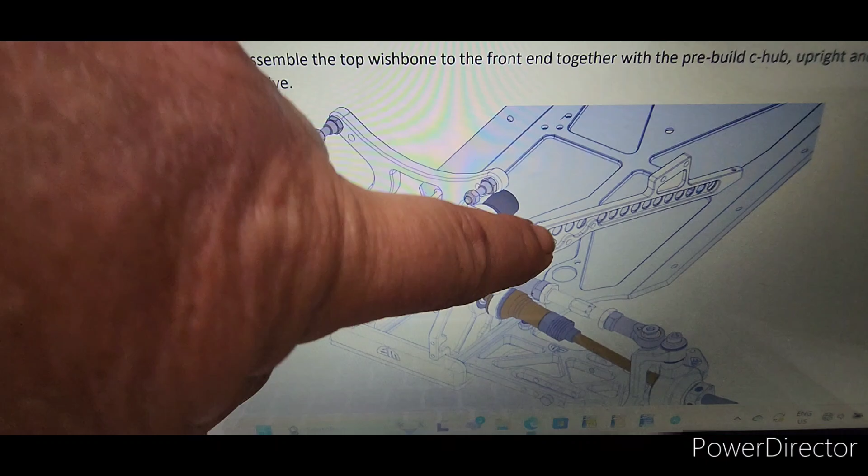Alright, this is what we're up to. I've installed that chassis brace. There it is, 2 bolts there which brings that together, and 2 bolts underneath. We're going to skip to the next part.

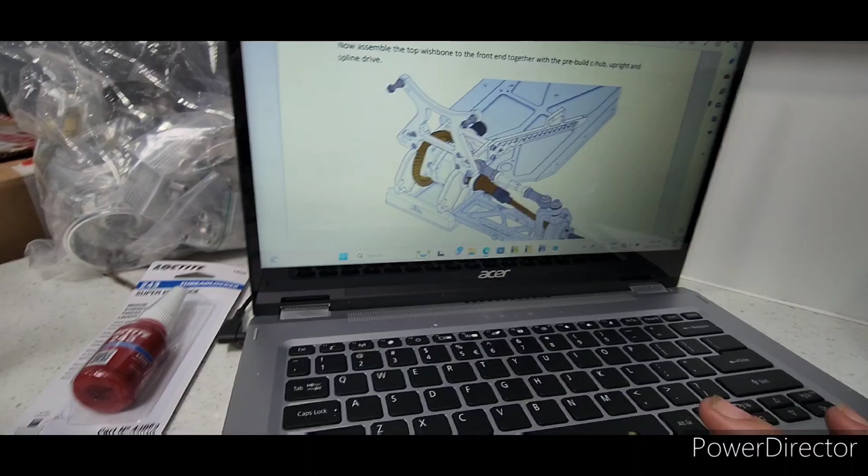Which will start doing the steering. Servo steering, here it is. So I've got all the parts laid out, that's your parts here, and we'll start putting it together.

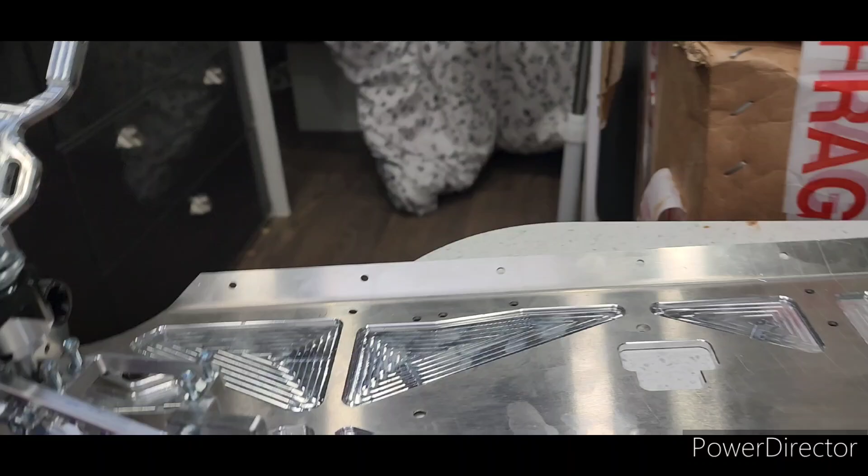Okay, got it all together. I'll put the servos in later. So what I'll do is get the other side done, that way this bit here is complete. And then we can move on to, I've got all this part goes on the engine, so that'll be the whole center bit. So anyway, I'll get this done first and then we'll start on the middle bit.

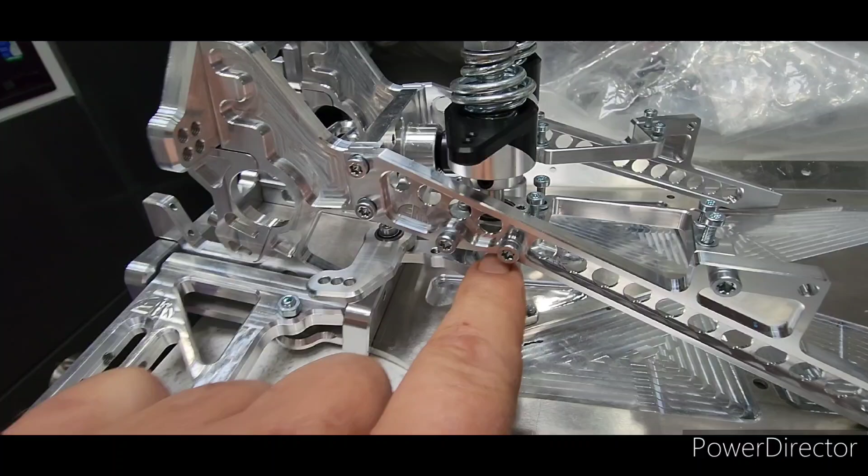Okay, I've put all the steering together, that's how it looks. Just goes like that. Pretty easy guys, now you got grub screws that hold it into place. Make sure you use Loctite on these. And you've got your bolt over the top.

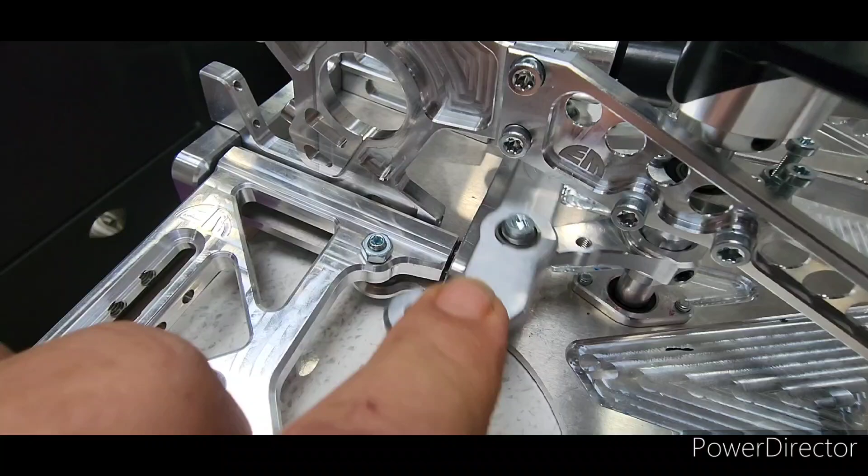Get your nut, screw that down. Then you got your steering plate, it's got a bolt that goes up through underneath. You got your bearings and inserts, pretty much the same as the Losi, how you got your inserts and your bearings. Yeah, and just Loctite it all up.

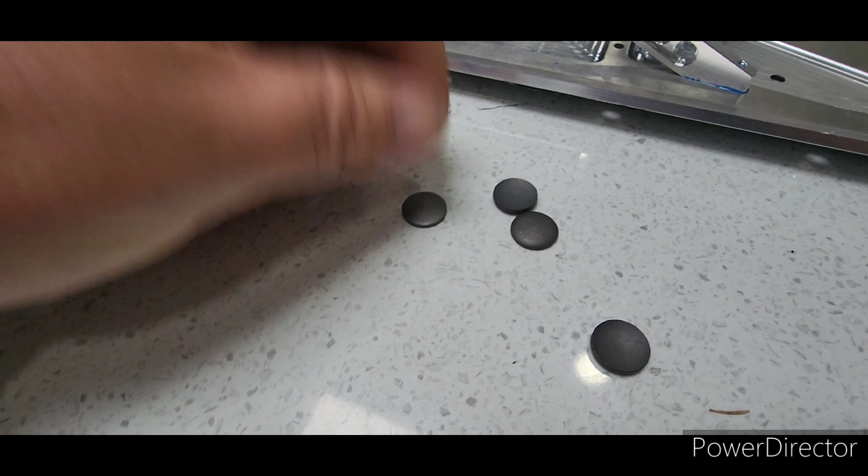What do I got to do next? I've got to put the bump stops in, forgot about them. Cheers, Ash. I was trying to work out which way they go, but apparently they go dome up, which will go in here. Make sure you glue them because you don't want them to come out. So I'll do that now. Okay, all the bump stops are glued in.

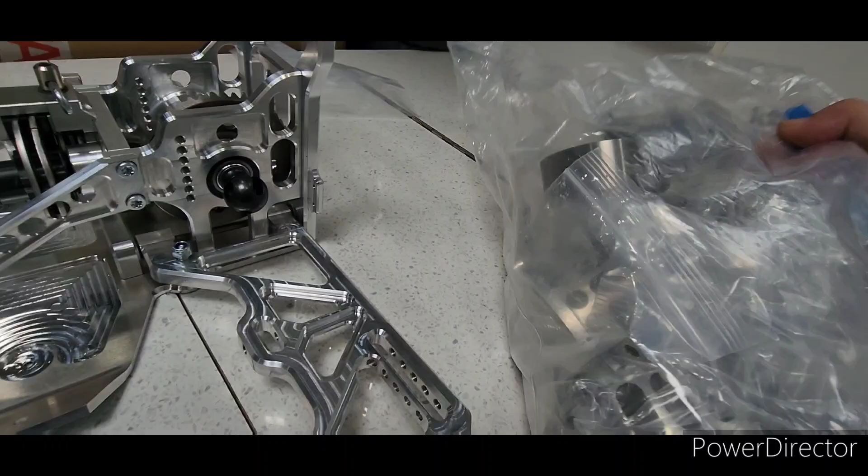So I've done all them. So what I'm going to do next, I have no idea. I might get started on the center bit. That's your engine and clutches. Yeah, I'll get started on this. So I have to take all this out and get started on that. That'll be all the center bit there. So alright, let's get started.

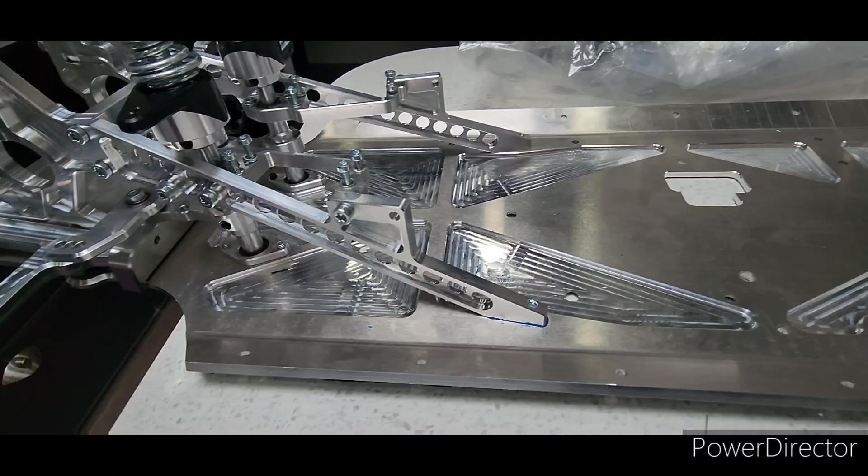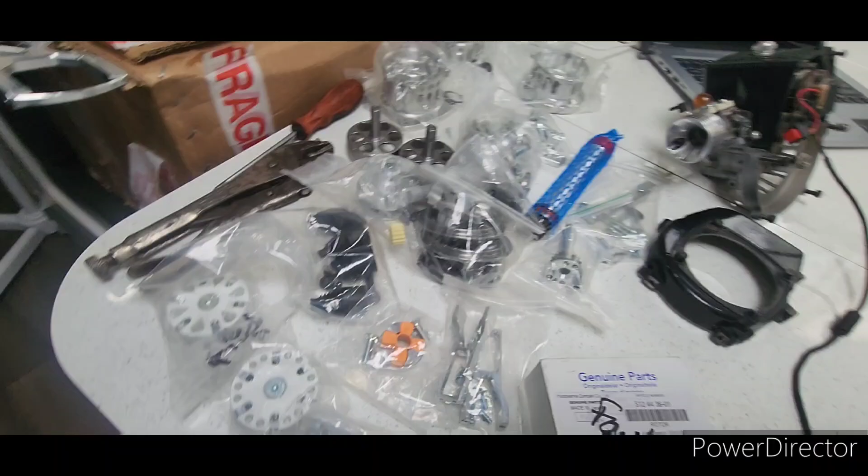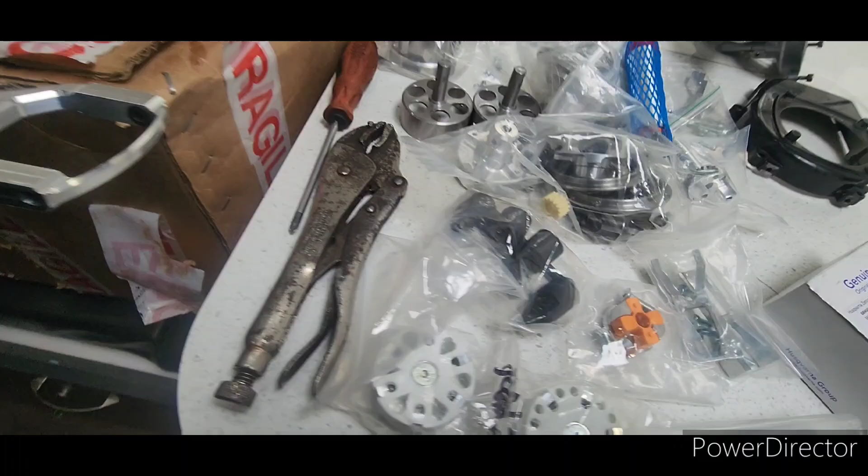Okay, I've pulled the engine out of the Losi 5. That's the 29cc ESP because I've rebuilt the 30.5cc, so that'll be going into the Losi. I'll be using this engine for the Elcon. I've got all the parts out now, and we're just going to start putting it together.

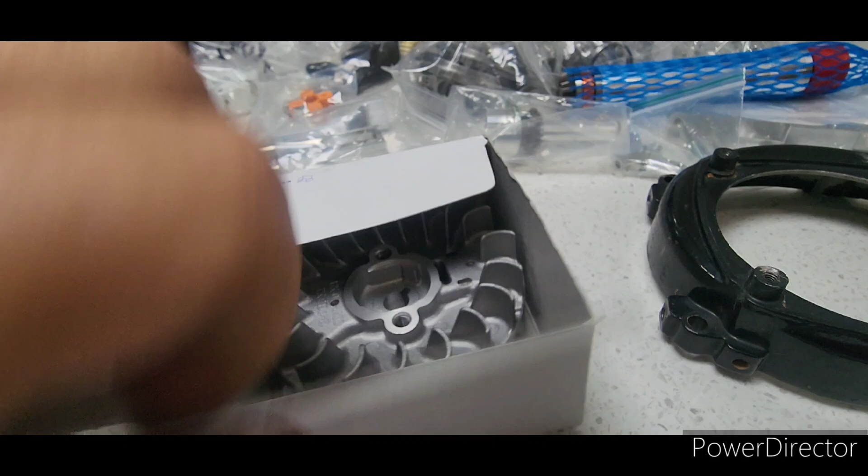I think the first thing we'll do is put the flywheel on. The flywheel will go on that one. That's it there.

So you do have to use this flywheel, it comes with the pack. So when you get an engine, make sure you take the flywheel out and put the new one in. Alright, I'll throw the flywheel on. Don't forget to put your key on, your little metal piece. Put your key on and then slide your flywheel on. Okay, flywheel's on.

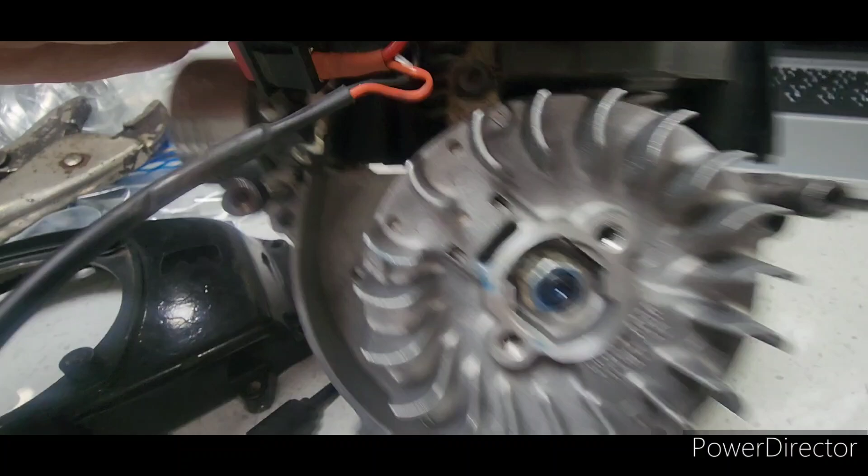I may have to reset the gap as well, which I'll do. So I'll reset the gap, do that, put the flywheel back on, cover, and then we start over here. Center part with engine, so engine and flywheel, we've already done that.

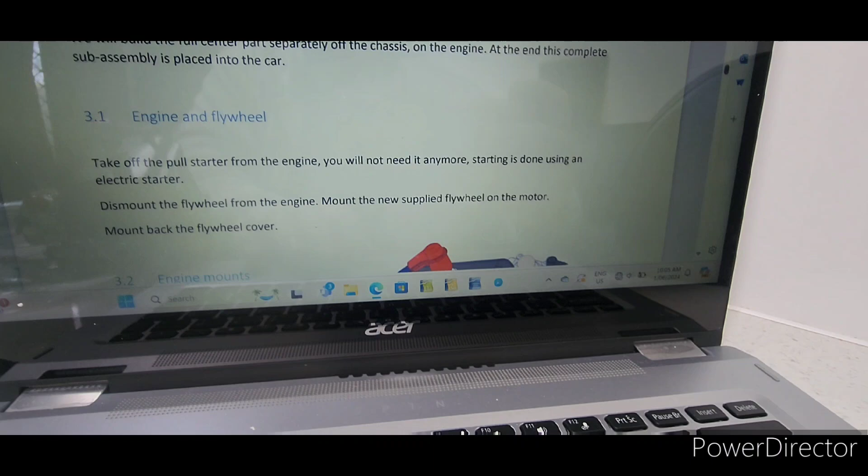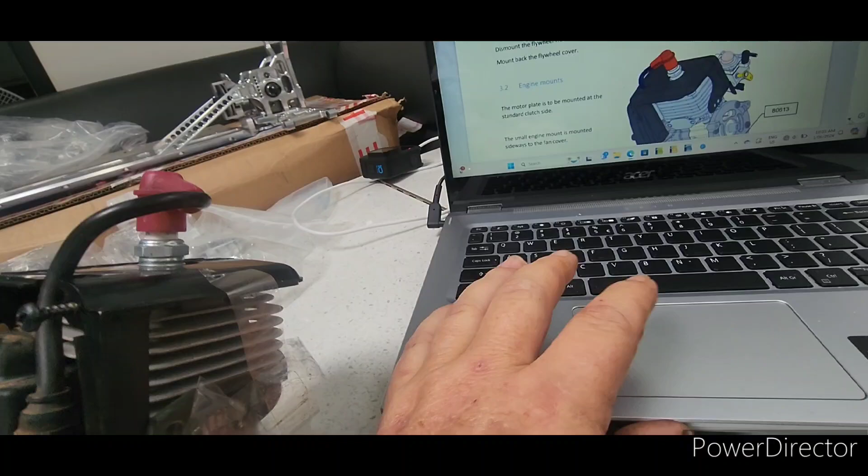And the great thing about this car is no more pull starts. It's all electric start, so you don't have to worry about replacing pull starts all the time. There we go, so that's what I'll do next.

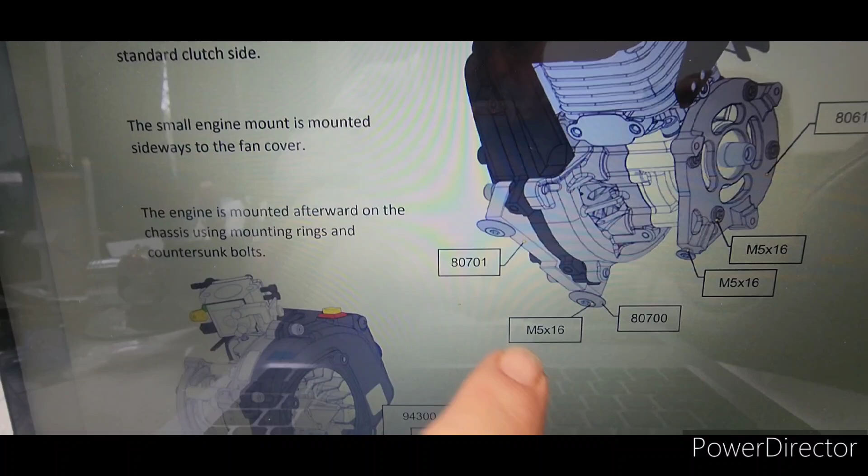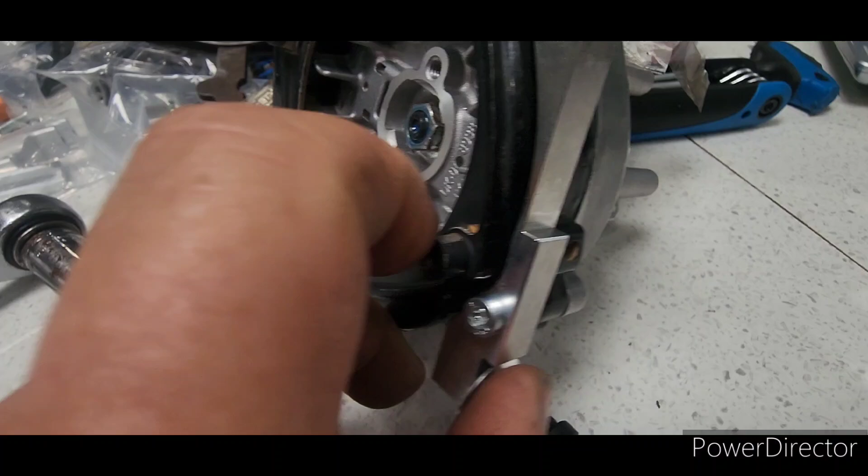So you've got this bracket goes on the clutch side, and this bracket here go on the flywheel side. Alright, do that now. Okay, that bracket's on, so it's just a bolt through there, and these will go underneath the chassis once you put it in.

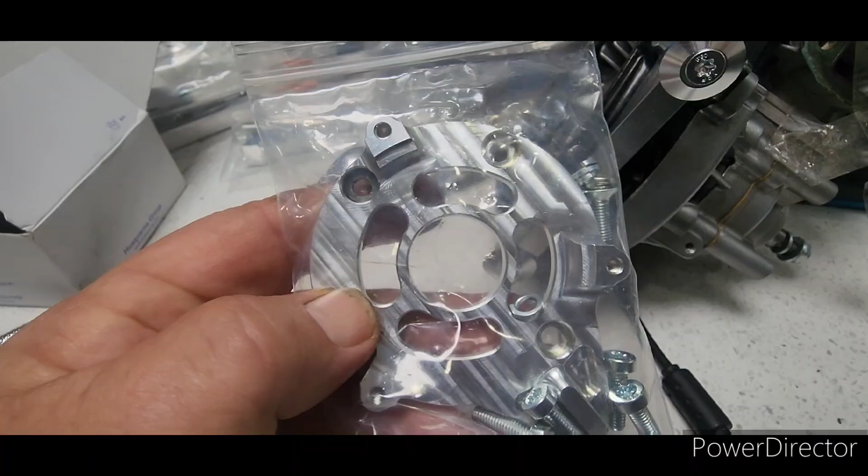But you just put them in there for now, like that. And I'm just going to do this side now, and put this bit on. Okay, that's all done up. So 4 bolts with spring washers. This one just goes in here, so that'll obviously go underneath the chassis as well, I'm assuming.

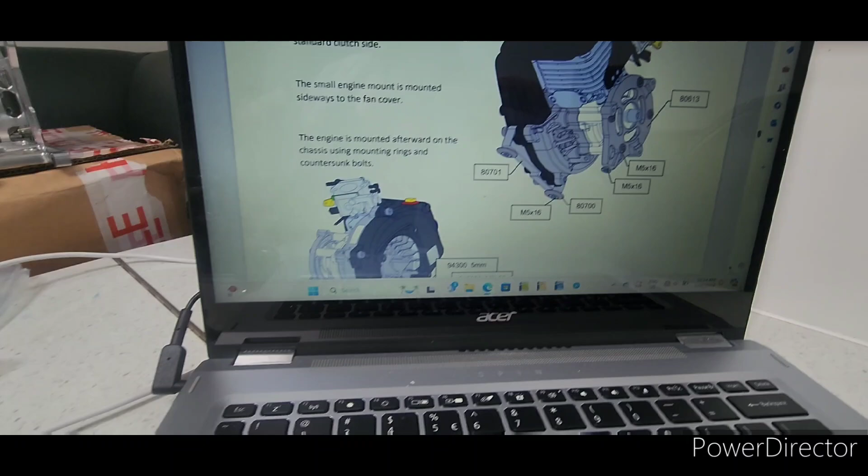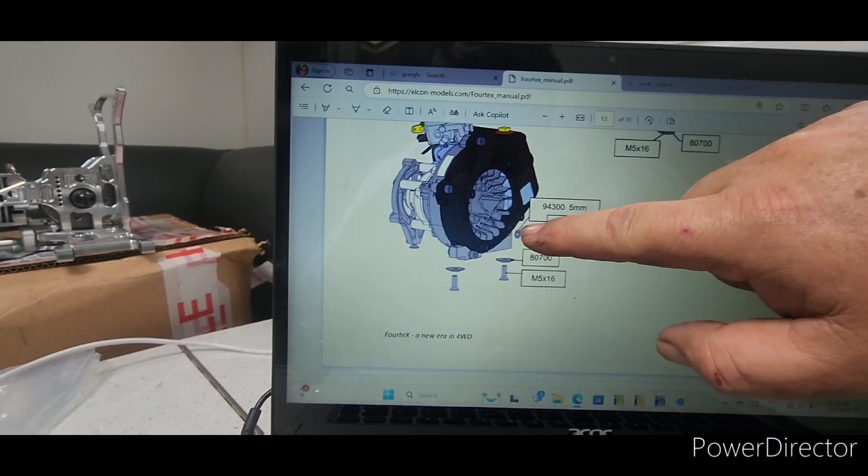So what's next? Scroll down a bit. Okay yep, so that's done. Hang on, yeah so the spring washer goes in that side. I forgot to put the spring washer in that, so I'll do that, I'll fix that up. But what's next?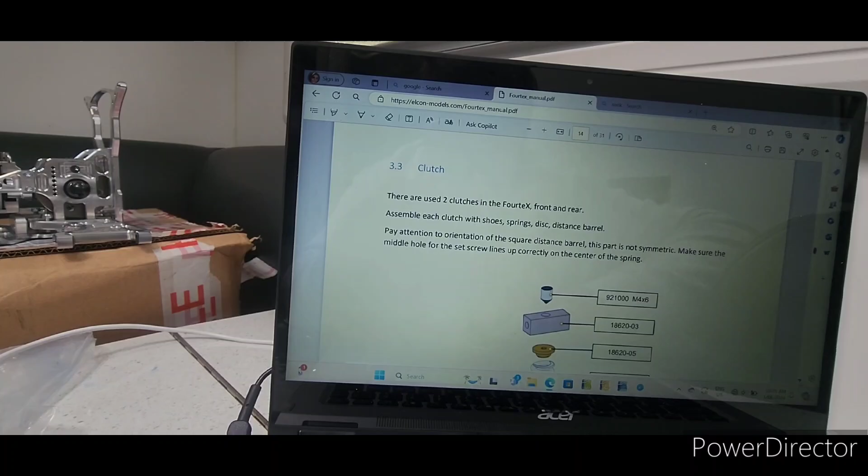There's 2 clutches in the Fourtex, front and rear assembly. My clutches are already assembled, Elcon Models already did that. So I've got the rear and the front, they're already done, and they're set up the way I want them set up. So what's next?

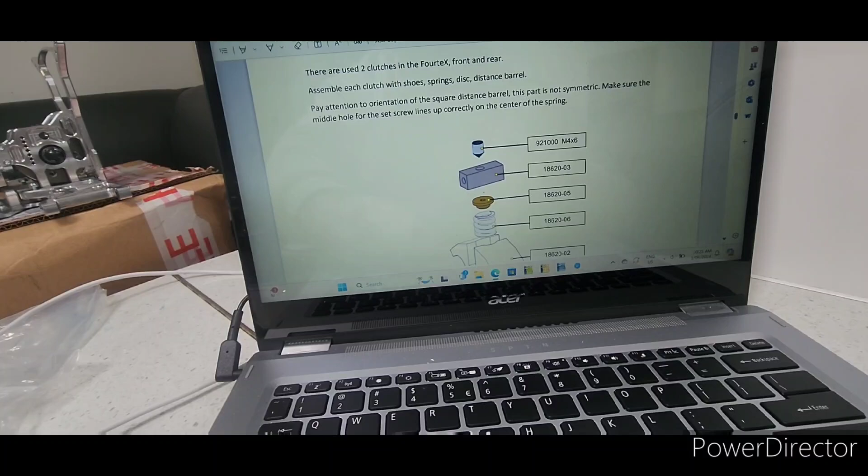Keep scrolling. All right, starter housing and starter shaft. Okay, assuming that goes.

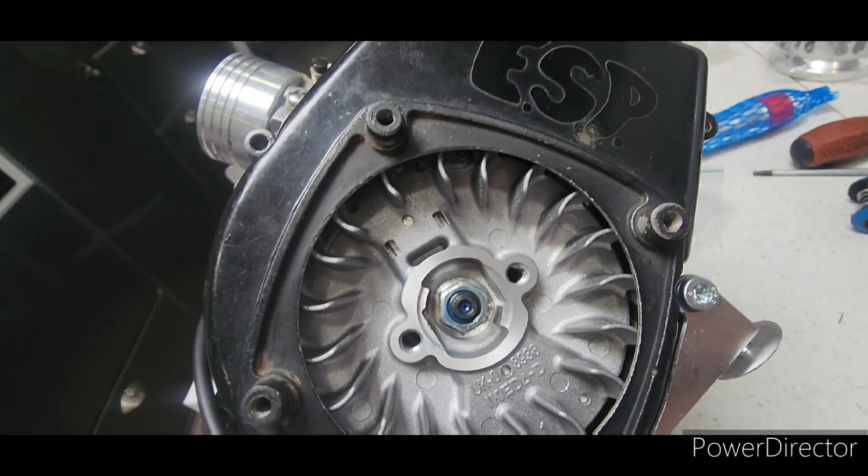That's for this side, for the starter. So I'll spin that around and get all these pieces out now. Okay, got all the parts laid out, so that's all the parts there.

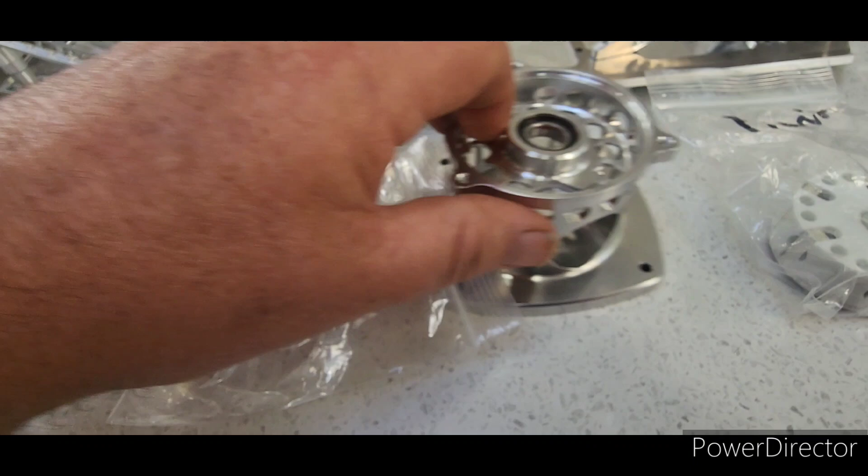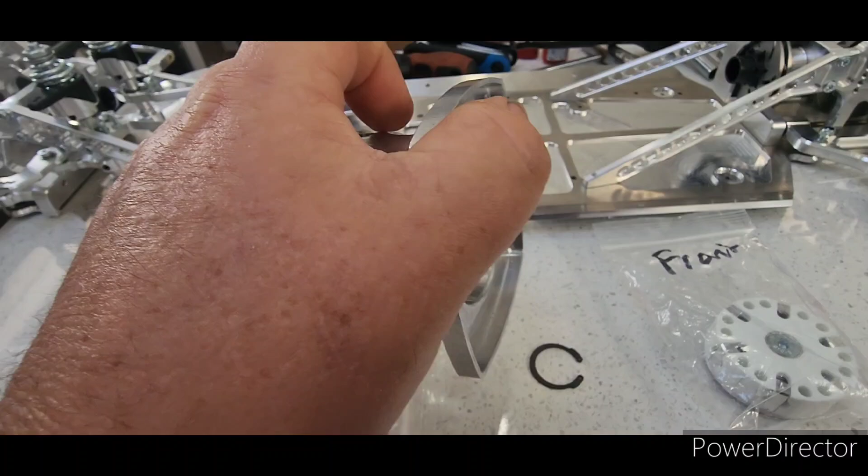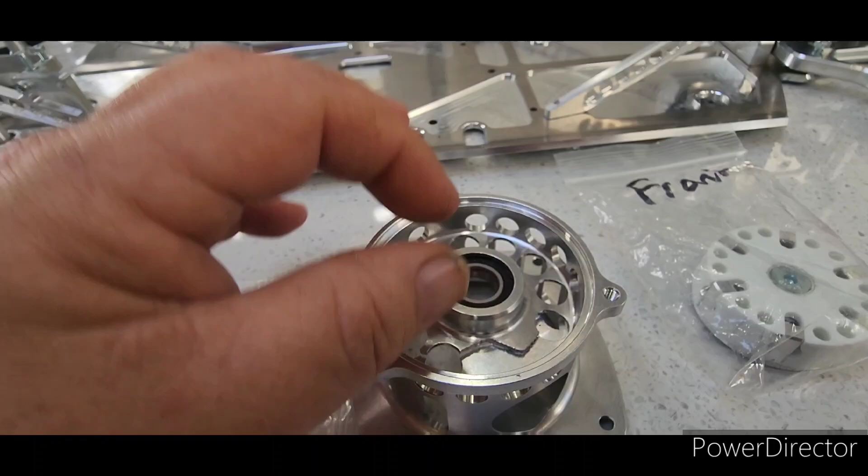So what I've done is I've made a rookie mistake. I went ahead and got the bearing and the housing, took it down to the shed, put it between my vise. I had a socket on one side over that bearing to press it in, put it in between the vise, had a towel over one side, started pressing in the bearing, and the housing cracked. What I should have done was had another socket on this side in the center to press it in. Rookie mistake, I wasn't thinking at the time. Oh well, I'm going to make mistakes.

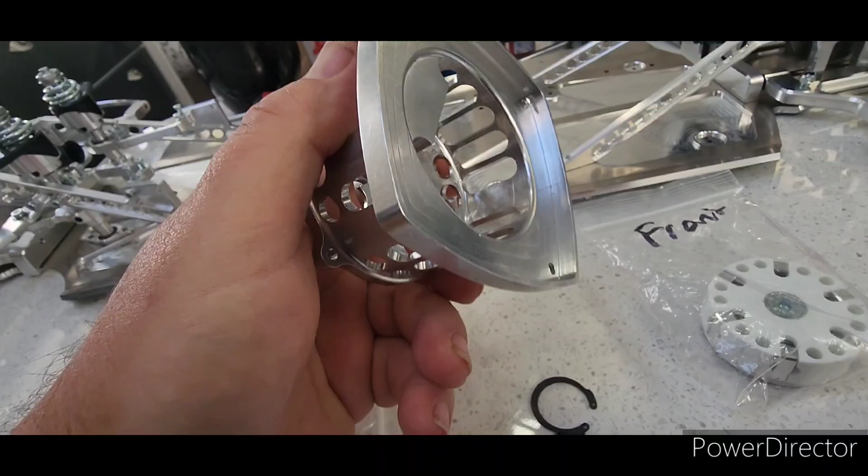Things happen. I got a hold of Cal at KingRC, I'm going to catch up with him next week at racing, and he's got another piece he'll give me, so that'll be all sweet. So I'll have to leave this for now and go back to it and go through the box, and we'll start on something else.

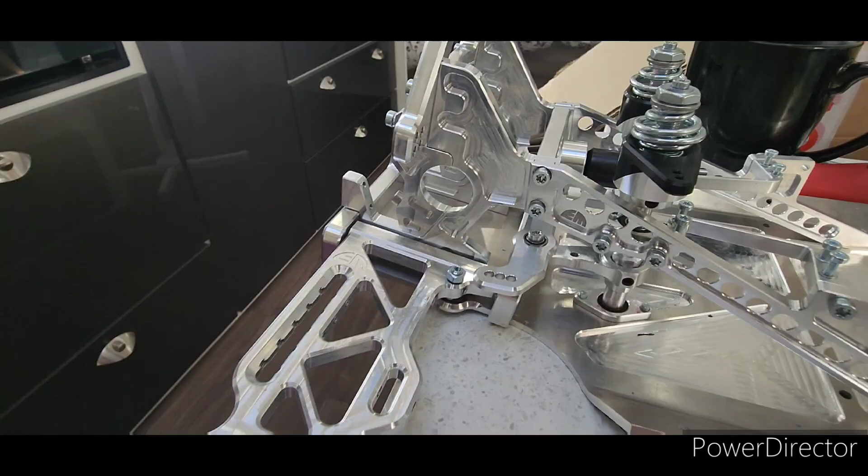But look at the quality of this car, guys. It's insane quality. I'm gobsmacked by just the quality of this car.

Anyway, yes, like I said, the steering's done. Make sure you guys use Loctite. Alright, let's have a look in the box and we'll start on something else.

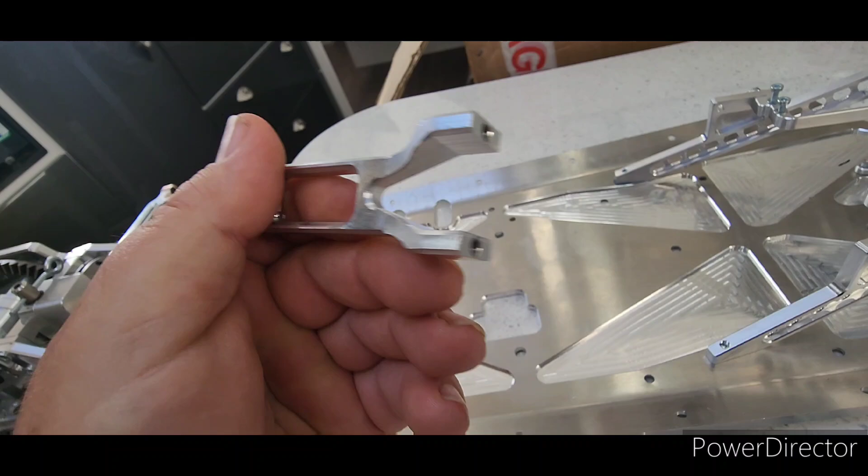Okay, found these brackets. Just every part I pull out is just absolute quality. It just doesn't get any better, guys.

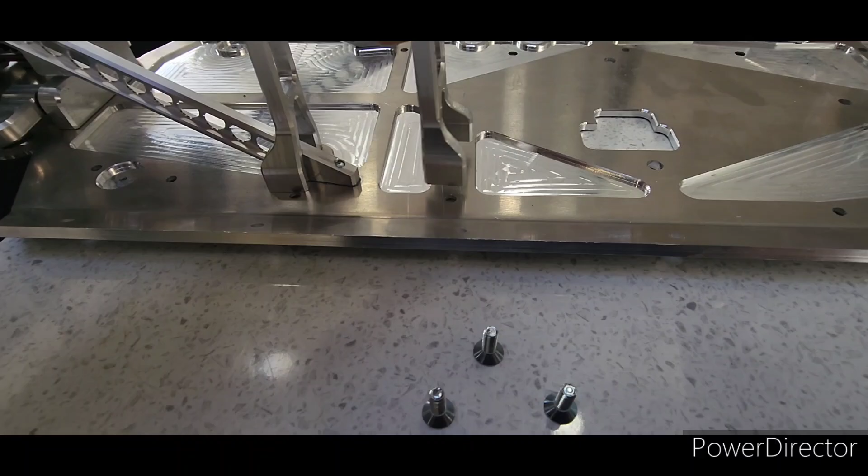Righto, so this will be the servo mounts for the rear, which I'm assuming will go that way and that way, by the look of that. Yep, that's how they go. So all it is, Loctite these up, 4 screws underneath.

Alright, I'll do that now. Okay, that's all done, Loctite it up. That'll just sit there like that.

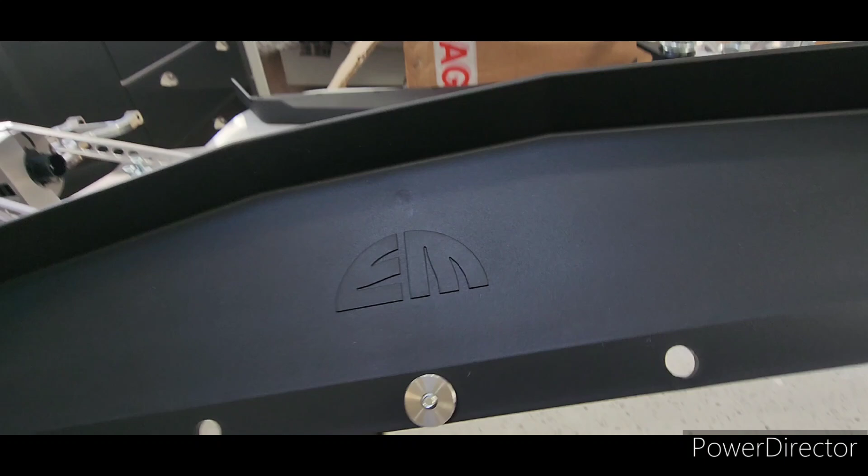I found the side pods or side guards. So your screw goes in one side. You got these bits here in the bag, which they go like that. There you got a nut, like a washer, and a screw.

There you go, it's focused better. Pretty easy, so I'll mount the side pods on now. Might as well get it done. Okay, put the side guards on.

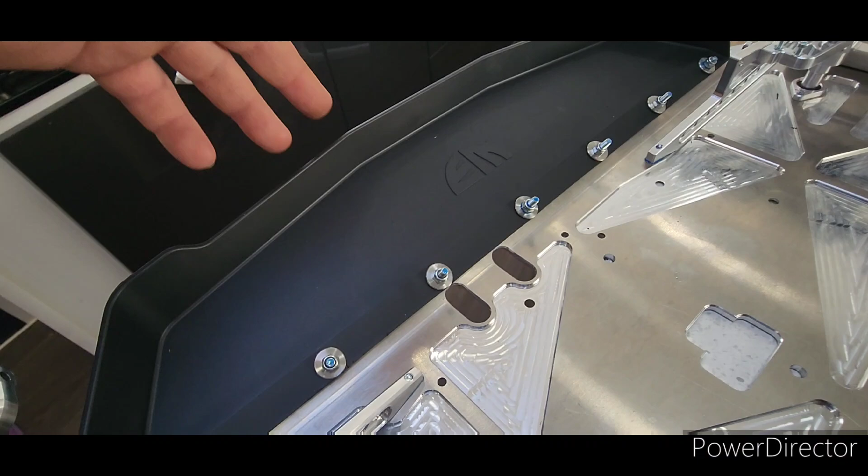They're all done. Just like every part I do, guys, it's just quality. Even these plastic, I'm not sure what plastic it's made out of, but it's real tough plastic. It's unreal.

Okay, so found this piece here for, it's obviously for your battery. So that's that piece here. So that'll slide underneath there, I'm assuming.

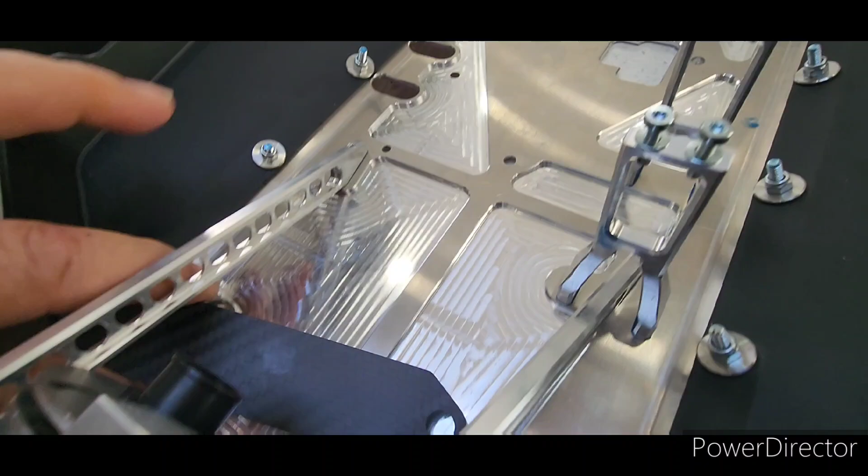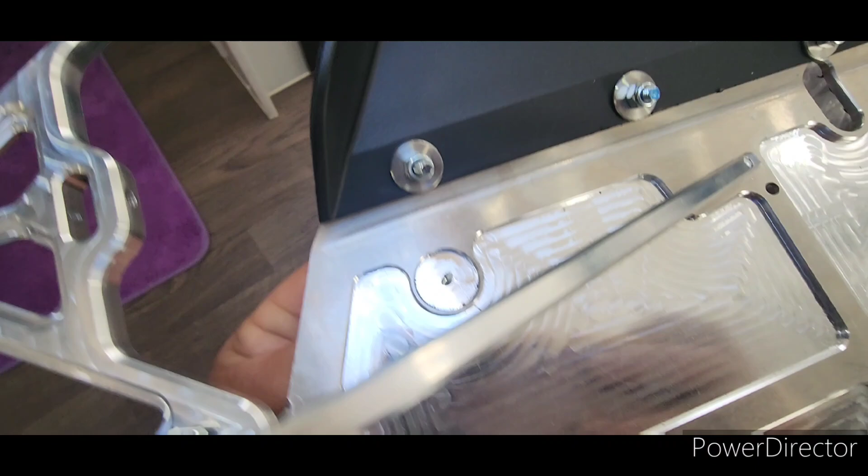Okay, I've worked it out. So there's 2 of the screws in the pack, this big. I'll go through here, like that. So by the looks of it, that's how they go. Not 100% sure, and these bits go over the top.

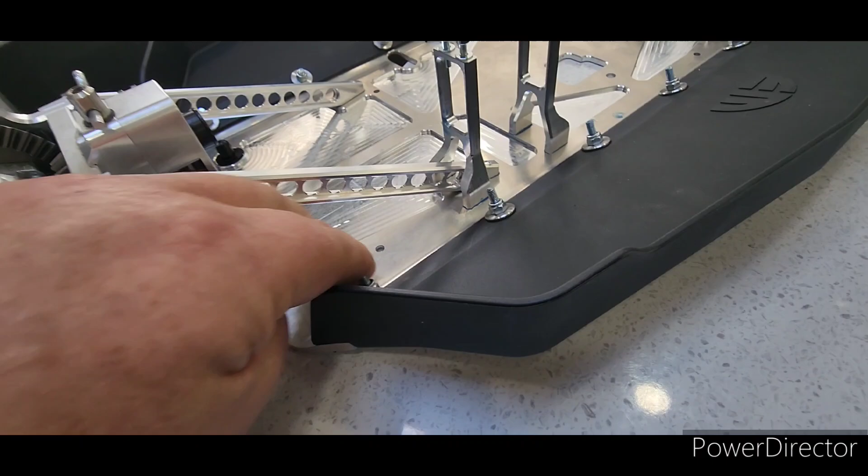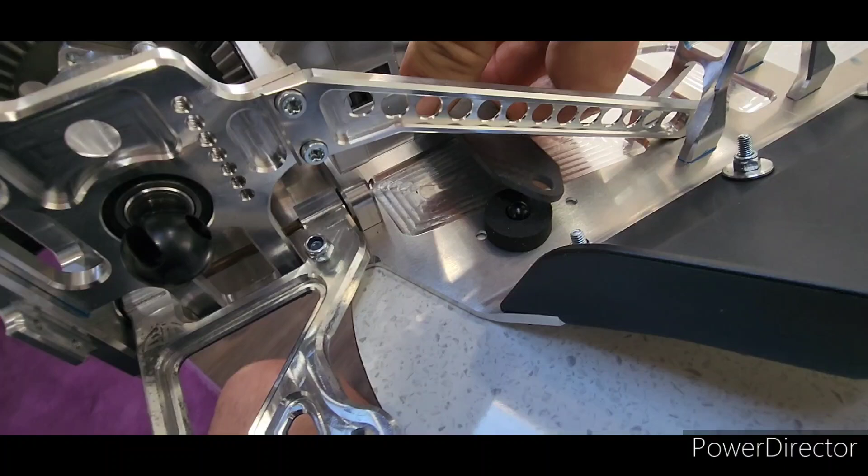And then put your chassis. It's a battery, it's for your battery anyway. This will go over the top. I could be completely wrong, so any guys drive Elcons, let me know.

And then you push that down and put the springs over the top. Hopefully that's right, clips over the top. So hopefully that's how it goes. I haven't even bought a battery for it yet, so I've still got to buy a battery.

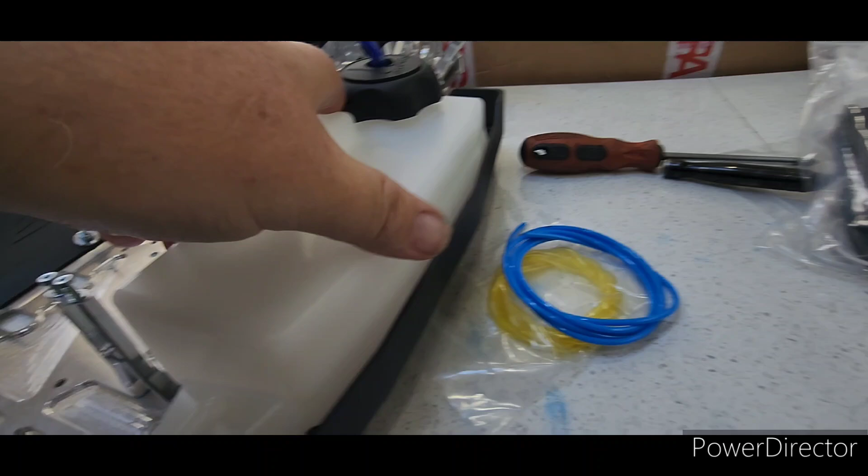What's next? I've got the fuel tank I can put on next. Which way does that go? I'll sit in there like that, I'd say.

And I've got your receiver box. That's for air brakes, I'm assuming, or I could be wrong, this might not be right. I honestly don't know yet, guys, I'm still going through it.

Obviously that's a fuel hose. And I've just got to find the rest of the parts, which I'm assuming, what's in here? So you got your fuel filter, obviously the bits and pieces to put the fuel tank in.

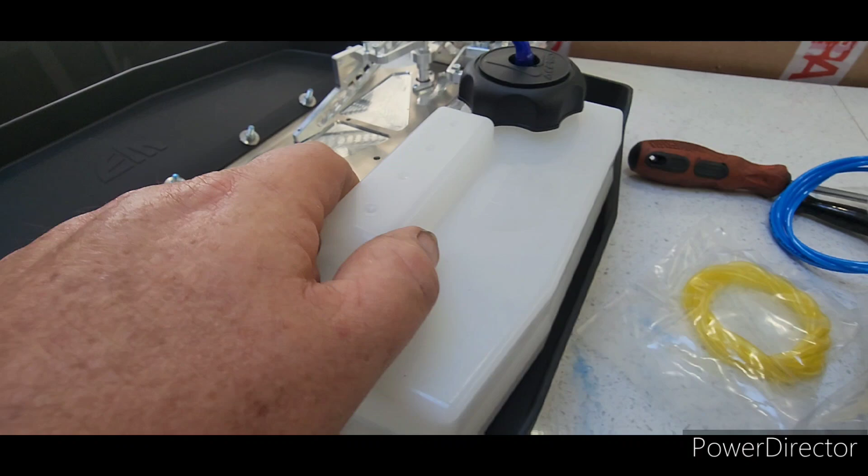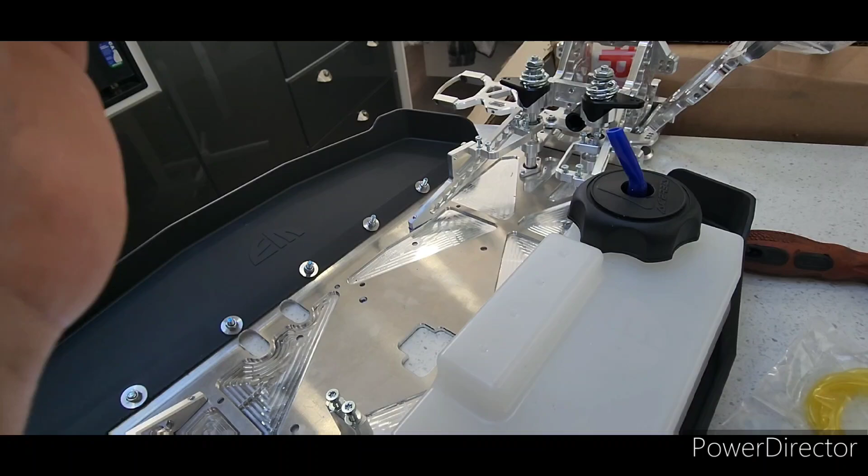I might leave that for this video, guys, and next video I'll get stuck doing the fuel tank, the receiver box. We'll install the servos, get them in, get all the wiring done, and then once I've got the other part from Kel, we can put the engine together.

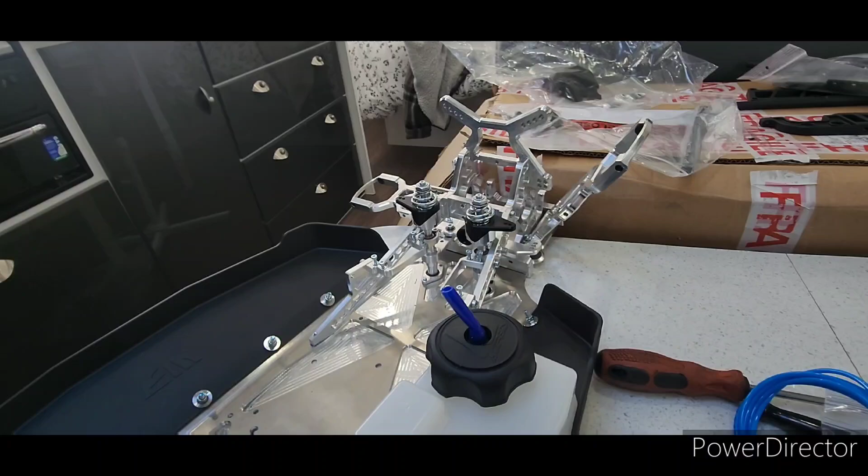And then yeah, still got to put the axles on, the hubs. Still waiting for the front diff, it should be here soon, hopefully. And then I can finish the front, and then put the wheels on and start her up.